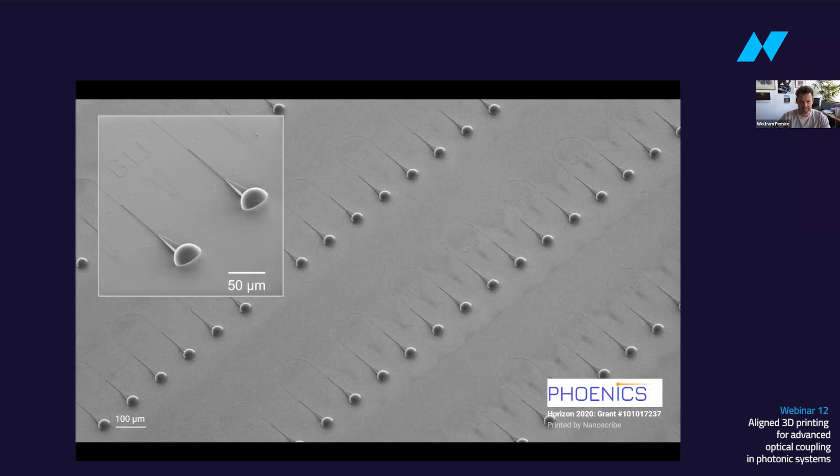Yeah, I shall. Thank you very much for the intro, and I hope you can all see my screen. If not, shout. Thank you for the kind intro and for the opportunity to speak here about the research we are doing. It's really a pleasure to present this, especially since we are very happy users of a Nanoscribe system - we use it basically every day in the lab for printing structures. Erik will show you some of the nice features we can build with them. That tool has also been somewhat instrumental in driving computing forward, which we now use in the context of AI. It's also great that Tobias is here, with whom we've collaborated for many years in the EU project, and actually also worked on improving the tools for printing such coupling structures in a hybrid project. So everything comes together very nicely today, and I'll set the stage and explain a little bit why I think this is a useful technology for the field.

So we come from integrated optics and build chips, a few of which you can see here on my first slide. These are semiconducting chips, many made from nitride or silicon, and we use those for doing computations - low precision computations that have applications in AI.

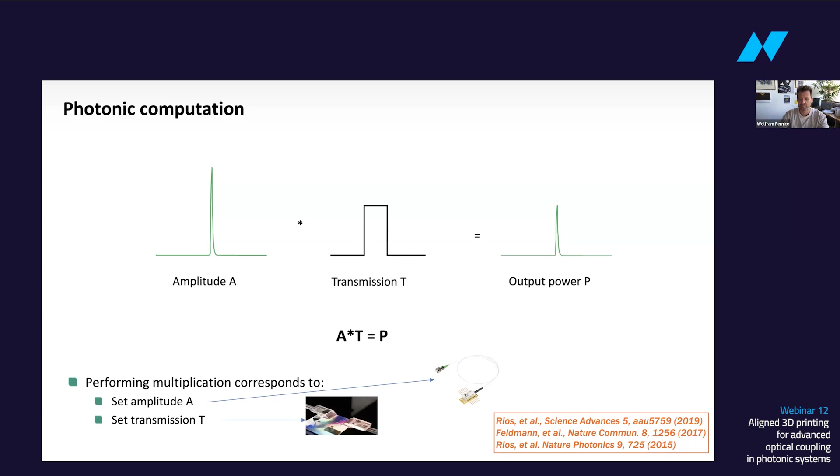You can do this nicely: you obtain a laser diode, with which you can set the amplitude by programming it. You then program the transmission factor, which you could do with a silicon photonics chip. And if you want to know the result of the multiplication, you measure the power at the output.

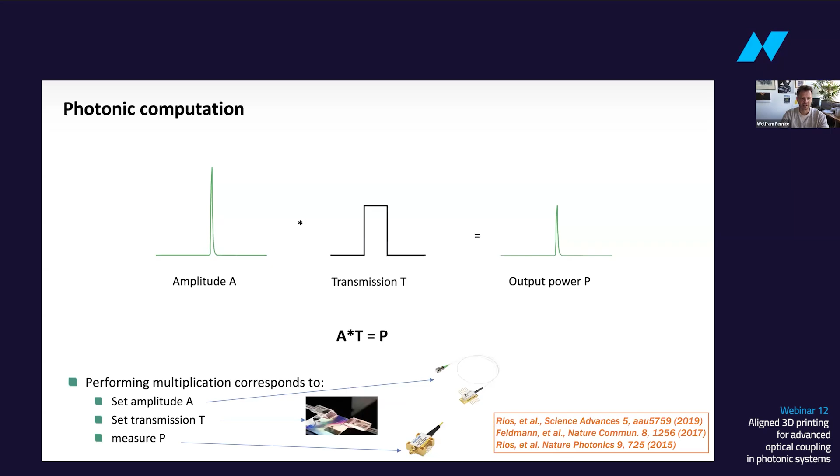This is attractive for us because the components are already available from silicon photonics. They also work at typical telecom frequencies, so very high speeds compared to digital electronics, meaning you get your answer in extremely low time frames — this is where latency matters. You can also do this relatively efficiently as long as your components are efficient.

If you want to scale this, all you have to do is make many of such devices. One approach we used is to take a light source that provides not a single input laser, but many of them — this is a frequency comb, for example.

We would encode our image in the input vector, using several modulators to set the amplitudes of each individual wavelength. Then we add them together in a photonic circuit that couples all these different wavelengths from separate input waveguides into a common output waveguide, where we perform the result by measuring the total power with a photodetector.

By doing this, we perform a very basic vector-vector multiplication: we multiply the input vector times the modulation, so multiply the numbers A and T, and get the full result of this operation in a single shot. And if you can do this for one row, you can do this for many, giving you a mathematical matrix implemented on a chip.

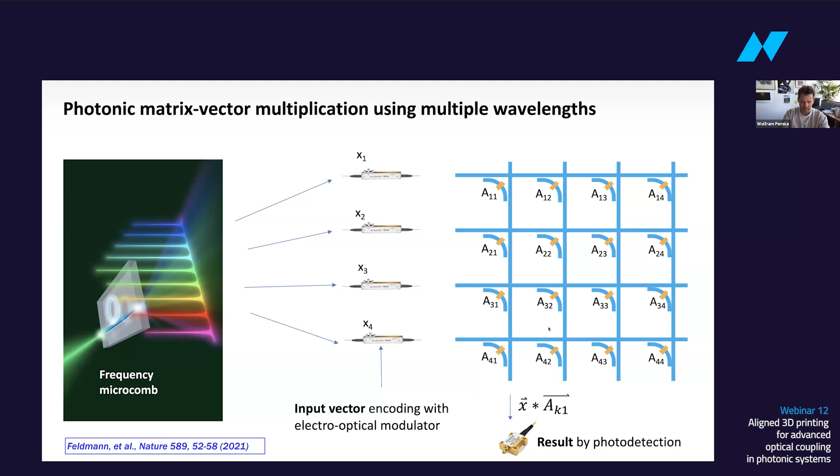Now I'll spend a few minutes explaining how we build those chips. We do this in the clean room. We don't work on wafer scale, but on a chip level.

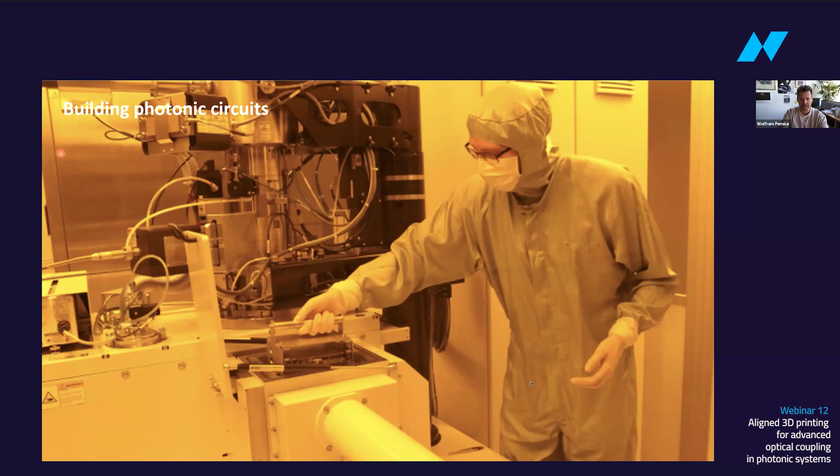We write our structures by electron beam lithography, and with the nanoscribe, as I will show you in a little bit, we etch those into our favorite semiconductor, silicon nitride or others. Then we get these nice looking chips here. If you zoom in further, you can also see the tinier structures needed because we work on the sub-wavelength scale. These are different types of resonators in silicon nitride and silicon, also photonic crystal structures. These are the typical elements we use for implementing these transmission factors for matrix vector multiplication.

This enables us to actually talk to these chips. We use two-photon polymerization to write fancy 3D structures directly onto these little waveguides, transforming a very small and confined waveguide mode into something that resembles much more an optical fiber. This has really been an enabling technology for us. It's also heavily driven in Karlsruhe and Heidelberg through the excellence cluster 3D Matter Made to Order, where these structures are built. On the chip you can see a selection of such coupling structures, and Erik will give you much more detail on how they work. They're basically total internal reflection systems that transform an in-plane mode into an out-of-plane focused beam, which we then collect with an optical fiber to read out the performance of our system.

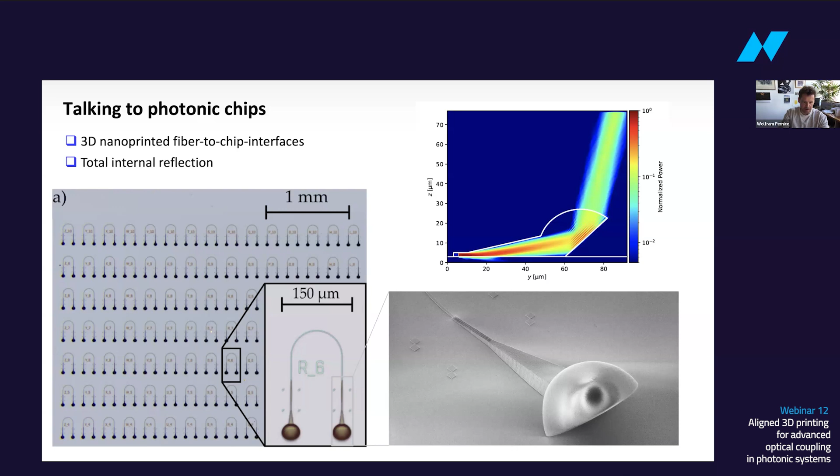What then needs to be done is house this all in a framework compatible with a computing architecture. This is the latest system we've built. It's a box that has all the driving electronics for the lasers, modulators, amplifiers, and detectors. You can also see here, in this circuit board on the right-hand side, the chip that is actually doing the optical calculation. It is fiber coupled through a special interface, and the rest is electronics, but it's small enough that you can fit it in a car or use it as a desktop, and it does exactly this acceleration.

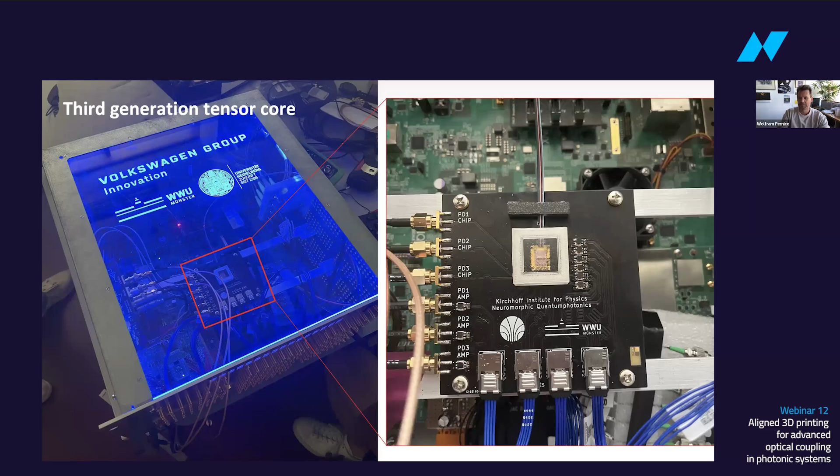I think at this point I'm way over time, and I'll hand over to Erik. I also thank him and the rest of my group for this work. This is basically the team that builds these optical computers and realizes all the systems in the clean room.

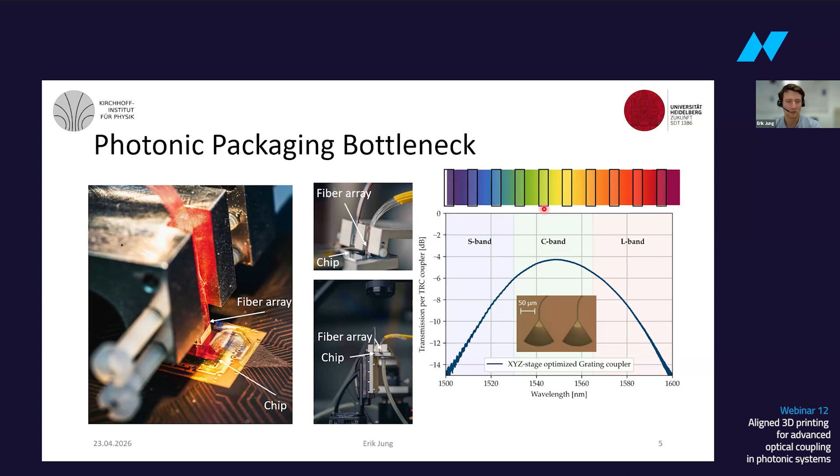However, those grating couplers do have a great wavelength dependency. What you can see here is the transmission spectrum, wavelength against transmission per coupler. I want to illustrate what this means once again using the visible spectrum I showed you before. Here we are working in the telecom band, as Wolfram already mentioned, but as an example I show you the visible spectrum because there are no visible wavelengths with which I can encode that. So here's the visible spectrum, and if I were to use a grating coupler to couple this visible spectrum inside my photonic chip, the coupler would absorb part of this transmission spectrum, and it would look more like this. So basically a couple of those wavelength bins are gone.

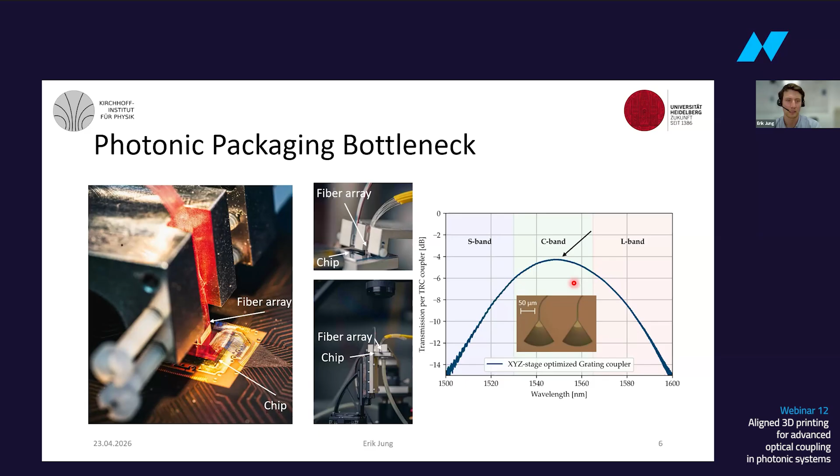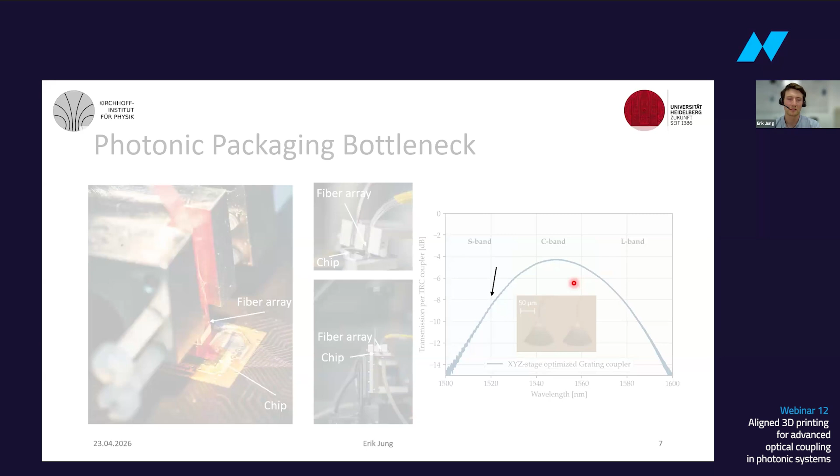This gets even worse if we look at this problem in real scale units. If we look at the peak transmission here of our grating coupler, I will now reduce the brightness of my slide accordingly—basically the image of the slide is sent through the grating coupler at this wavelength, and this results in this transmission. If we go 30 nanometers away from the optimum—in the visible spectrum, the equivalent of going from green to yellow—you only see this much. And this is only the efficiency which is absorbed by the coupling interfaces.

So as you can see, there are a lot of open challenges in the domain of photonics. For that reason, Wolfram came to me at the beginning of my PhD with this wish list for photonic packaging.

We want to profit from the full multiplexing capabilities of photonics without loss of data. So we want low loss and broadband coupling. We want to interface multiple ports at the same time, so that we can realize photonic applications and not only address individual ports. As I showed you on the right-hand side, we also have electronics on our photonic chip, so we want the capability to co-package electronics and photonics. And last but not least, we want passively self-centered alignment like in electronics.

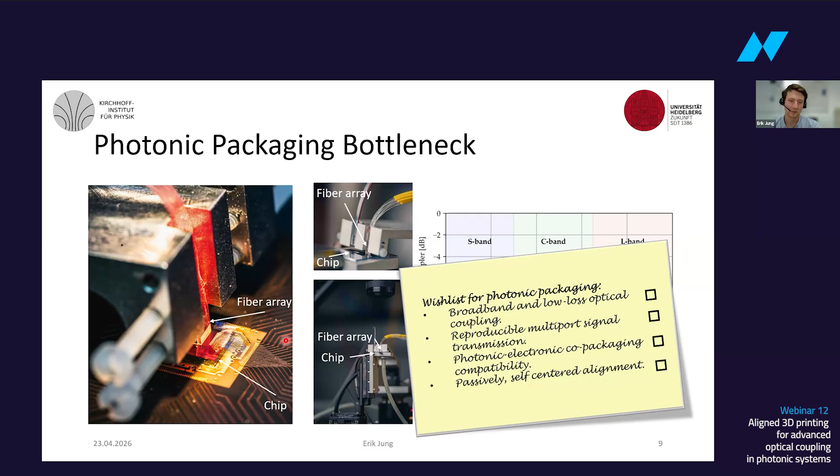So we sat together at University of Heidelberg and came up with this coupling concept. On the left-hand side you can see a sketch of the coupling concept. We use a fiber array, an MTP cable, with included alignment pinholes, and fabricate the alignment counterpart directly on the surface of the photonic chip. Those pins are the alignment counterpart onto which the MTP cable is plugged. Coupling is done via total internal reflection couplers, which will be discussed in detail in the upcoming slide.

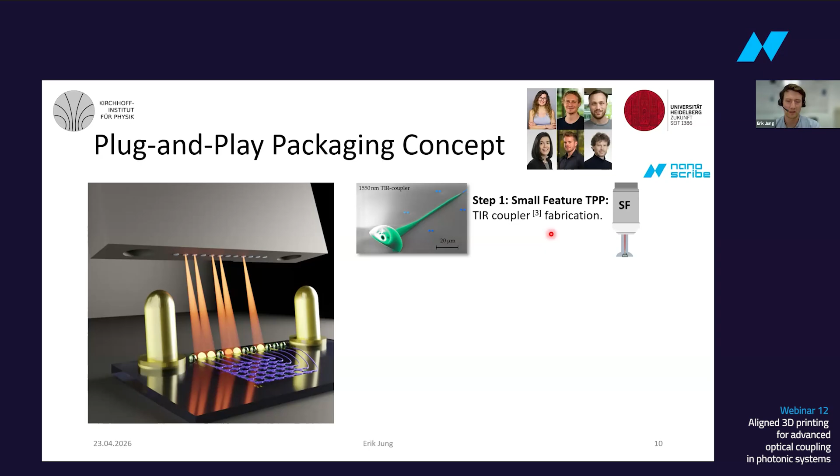This is a multi-step procedure where the Nanoscribe technology helps us in an insane manner. In the first step, with the small feature set of Nanoscribe, we write structures with nanometer precision and optically smooth surfaces. In the second DLW step, also with Nanoscribe, but this time with the 10x objective, we write the alignment pins as well as some spacers so that our fiber array does not crash into our photonic integrated circuit.

This preset is optimized for speed and micrometer precision. You might think this will take ages, but these pins are fabricated within 20 minutes, and they are 2 millimeters high, fabricated within 10 to 20 minutes with the technique of Nanoscribe.

In the third step, we deploy digital light processing printing to print a pre-alignment structure, which you can see here, which basically carries the weight of this MTP cable, as this is a centimeter-high glass fiber block.

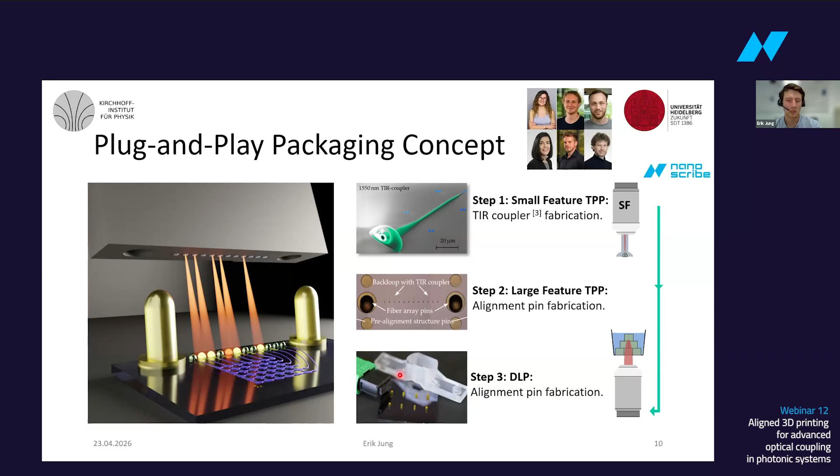So let's come back to the coupling interfaces. I was lucky to have a very competent predecessor, Helge Gehring, who developed the first total internal reflection coupler. On the left-hand side you can see such a coupler on a silicon nitride substrate. You have the silicon nitride substrate and such a polymer coupler on the substrate. The polymer couplers are written with aligned two-photon polymerization on top of the silicon nitride substrate.

They are based on total reflection and not on diffraction, in comparison with grating couplers, and are therefore very broadband. They normally consist of 4 distinct sections: the mode transfer section, where I transfer the on-chip mode to the polymer mode; the mode field widening section, as Wolfram mentioned, since the mode field diameter of the fiber is a factor of 10 to 20 wider than the one on-chip; then a total reflection plane, which redirects the light beam out of the plane of the chip to our fiber array; and then a focusing lens atop. This focusing lens focuses down the light beam and mimics the behavior of the diverging beam out of the fiber, and this is also the component which we optimized in comparison with Helge's original total internal reflection couplers.

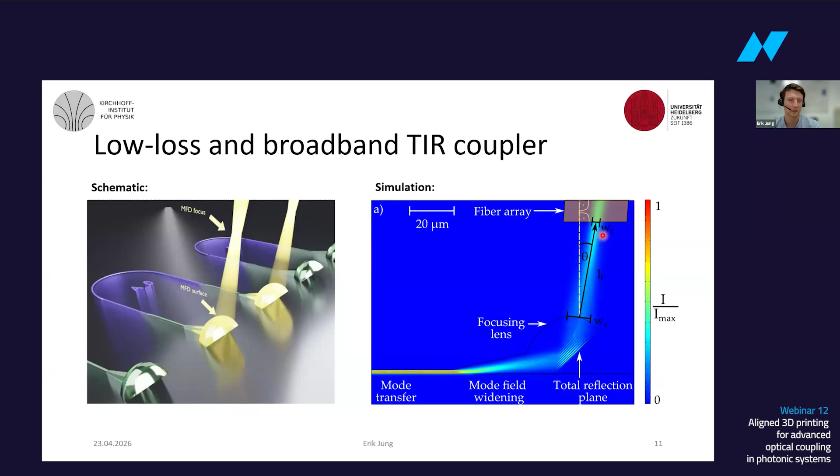On the left-hand side, you can see part of a chip which we fabricated with this technology. We printed 150 different coupler geometries, each 6 times, so in total 900 geometries done. With the technique of Nanoscribe, this is possible within one night slot.

One coupler takes approximately 1 minute with aligned two-photon grayscale lithography. If you cycle back, or if you are still a GT user, we also fabricated this beforehand with the GT, and it took 16 minutes per coupler. So there's an immense increase in speed using grayscale lithography.

On the right-hand side, we can see the transmission spectrum of the 3 nominally identical best couplers, showing the low standard deviation of the coupler transmission spectrum and basically their wavelength independency, plus their peak average transmission at 1550 nm of 0.45 dB. If we apply the same transparency filter, basically sending this image through a total internal reflection coupler, this results in blending down my screen in that manner, showing basically no deviation between what you saw beforehand and what you see right now.

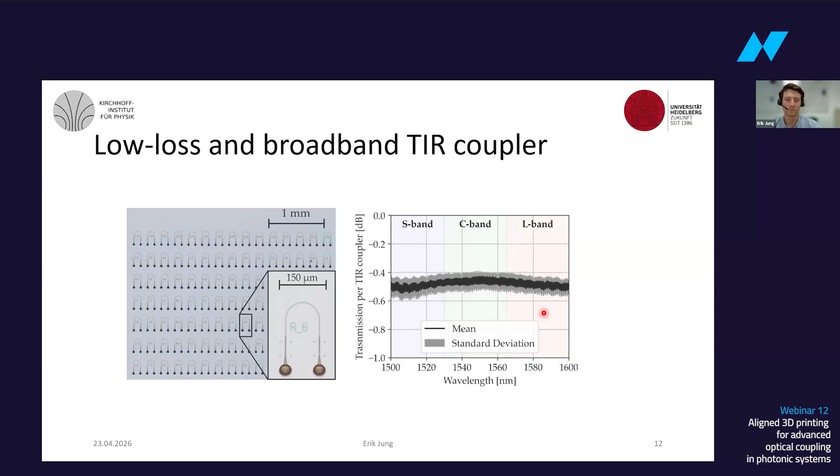To demonstrate the packaging concept is working with multiple ports, we interfaced a photonic matrix with 16 ports. Here you can see an image of this photonic matrix, the pins, and the 16 ports of the photonic matrix, and we compared the transmission of the individual ports to that of a grating coupler.

If we play the same game as beforehand, but this time on the left-hand side we are using the grating coupler to couple in, and on the right-hand side of the picture we are using the 3D coupler to couple in at the peak power of the grating coupler. This results in that image, and if we go further away, this results in that image. So basically we have, for the already packaged matrix vector plug-and-play connector, a higher transmission in comparison with

the state-of-the-art grating coupler, and this is only possible with structures based on... which are not based on diffraction.

If we now look at the close-up of the transmission spectra of the individual ports, we can see that they also have the same behavior in general. So all 16 transmission spectra show basically the same peak performance and also the same wavelength-independent behavior across the different matrix ports.

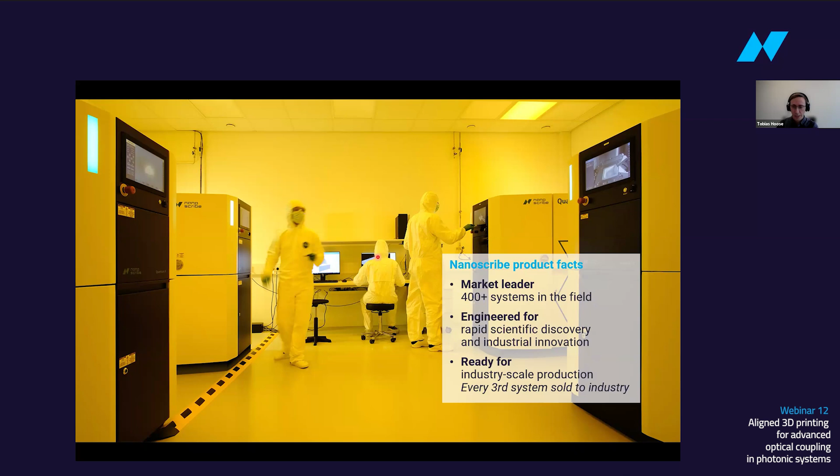Let me give you a quick look inside our lab here in our headquarters in Karlsruhe. This is the lab where I'm working, and we have here a small print farm with our Quantum X Align systems. Basically, here is the place where we push the limits of two-photon lithography, where we develop industrial processes for our customers, and where we run feasibility studies for prospects who are interested in our two-photon technology.

What can you do with our technology? You can do prototyping, you can fabricate templates for mastering, and you can also do direct manufacturing of optical elements, as you have seen already before, these out-of-plane couplers. You can print lenses on the edge of chips, or you can also use it to produce lensed fiber arrays.

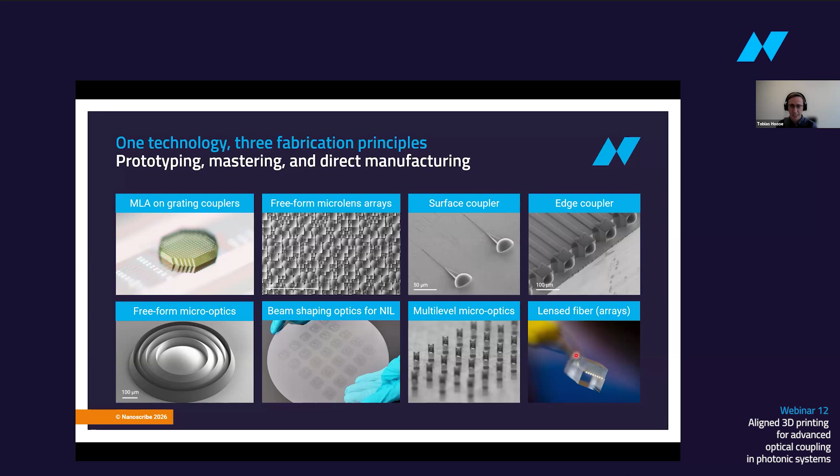We offer different print sets for this. For example, there's a small feature set used for highest precision, as Wolfram does in his group. With this set, you can print also these filigree tapers. Then we have the medium feature set, which is a very versatile print set with which you can print arrays of these lenses on a chip edge, but still get high optical quality lenses.

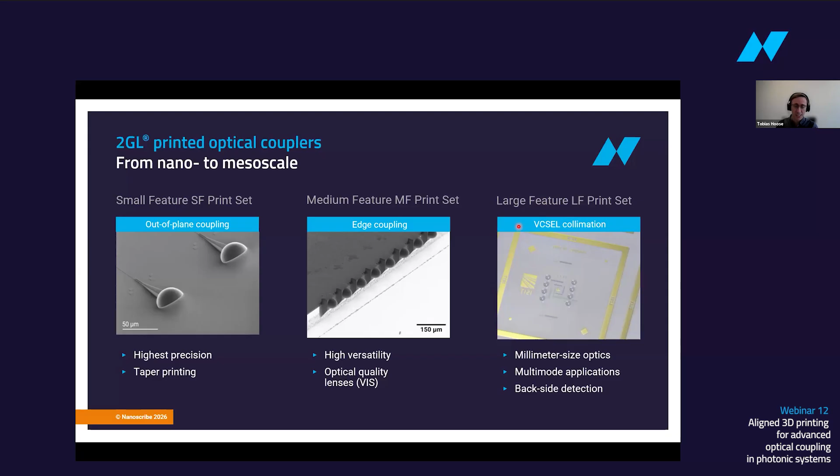Then we also have the large feature set with which you can print millimeter-sized optics, for example, for multimode applications. And the large feature set has a nice feature in that it has a very long working distance, and with that you can also do backside detection.

But to print good working optical elements, you not only need the hardware, you also need software that can take care of that, and that is also very user-friendly. Here you see a screenshot of our nanoPrintX software, and what we did, especially in the PHOENICS project with Pernice's group, as you have seen, they needed to print a lot of sweeps of their structures, and something like that you can very easily realize with our software.

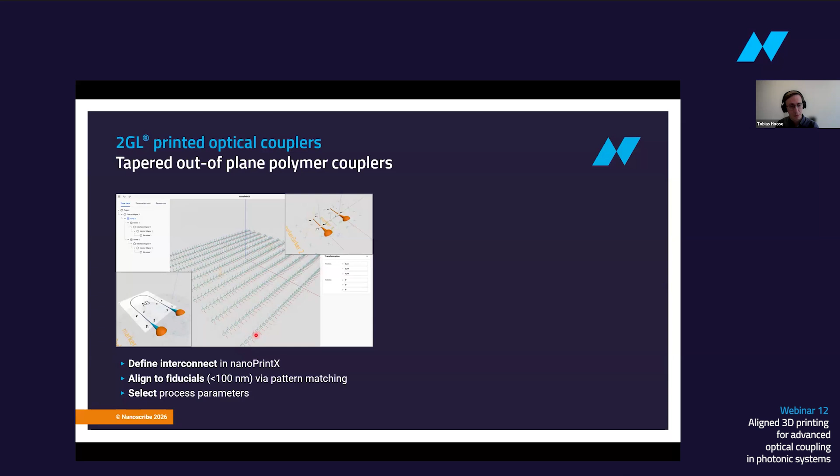Inside the software, you can define the interconnect you want to print. You can also load the GDS file or your wafer map, parts of that, align the structure inside the software to the fiducials which are on your substrate, select the process parameters, send it to the printer, and like that you can easily get hundreds of these out-of-plane couplers fabricated.

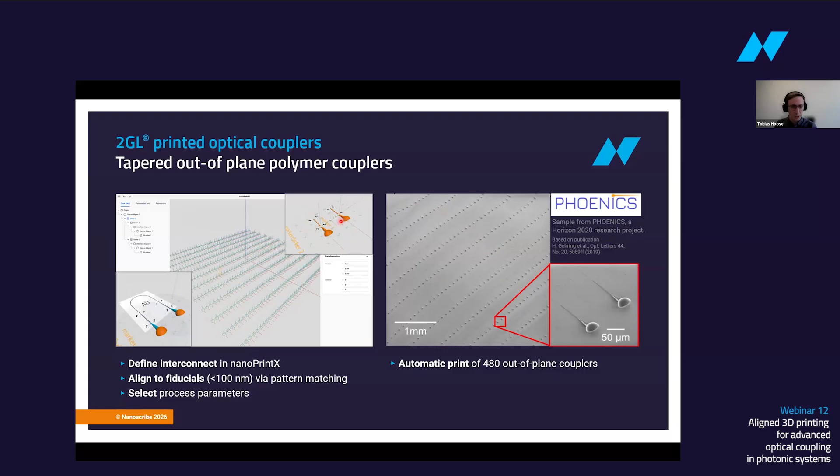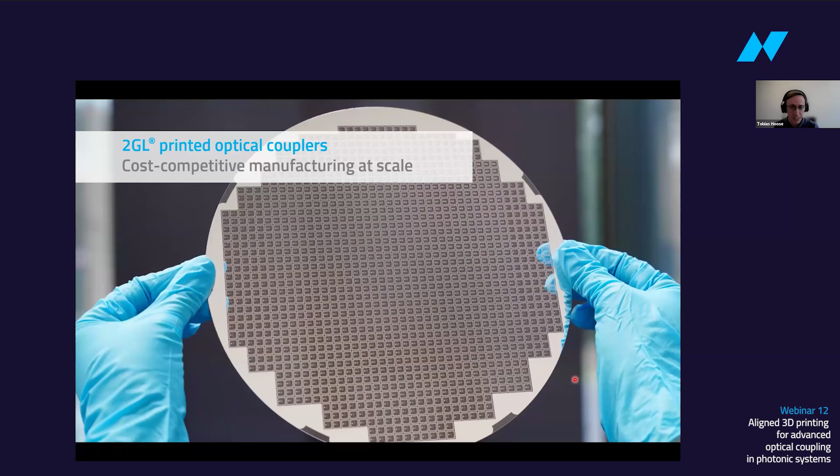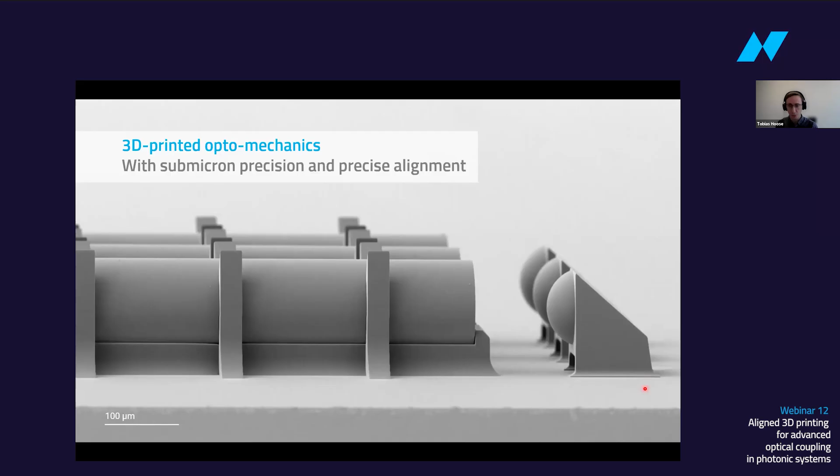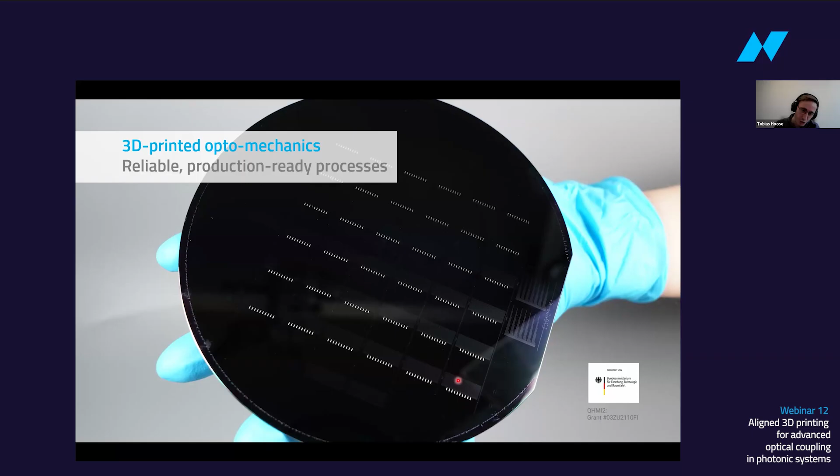And this also works on wafer scale. What you see here is a 6-inch silicon nitride wafer from IMS Chips in Stuttgart. These bright spots here are basically all these fiber clamps I showed you in the SEM image beforehand. And these less bright structures are the waveguides, which are connected to the grating couplers. All this is printed with our system QuantumX Align.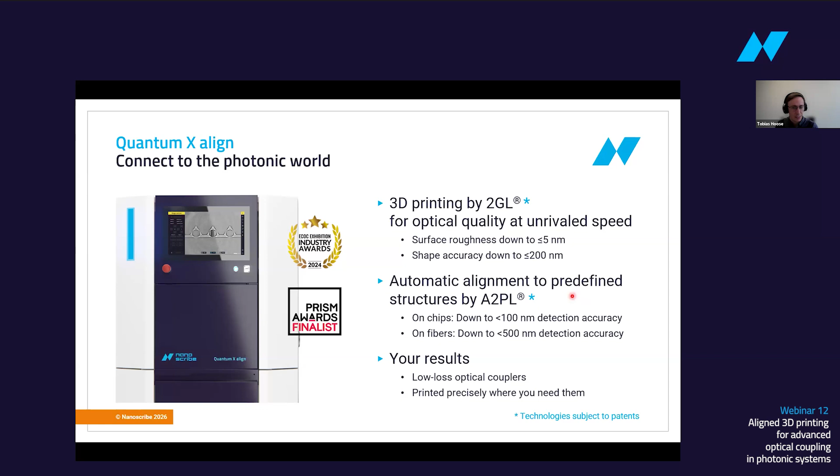The QuantumX Align comes with our Two-Photon Grayscale Lithography, with which you can reach high optical quality surfaces with low roughness and very good shape accuracy. Inside our system, we also have a confocal module with which we can align the structures you want to print to predefined structures on your substrate. And like this, you can achieve low loss optical couplers, printed precisely at the position where you need them.

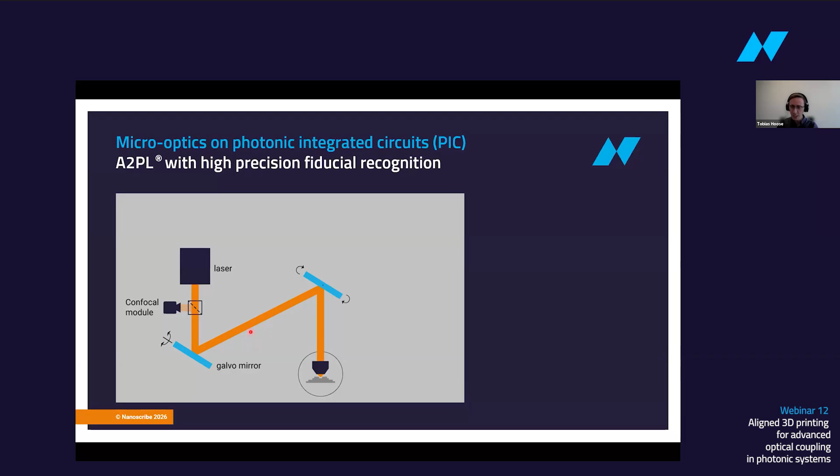Here's a very simplified sketch of our lithography system. We are using a femtosecond laser, which is focused through an objective into the photoresin, and it excites the photoresin to polymerize. By using fast scanning galvo mirrors, we can steer the laser back and forth through the resin. At the same time, we are moving the stage, which carries your sample along the axis of the beam. Like this, we can create 3D microstructures. And we included a confocal microscope inside the system for detecting alignment markers or chip edges of your substrate.

Since the same laser and the same optical path are used for printing and for detecting, we are already inherently calibrated. Like this, you can achieve very good alignment accuracies down to 100 nanometers.

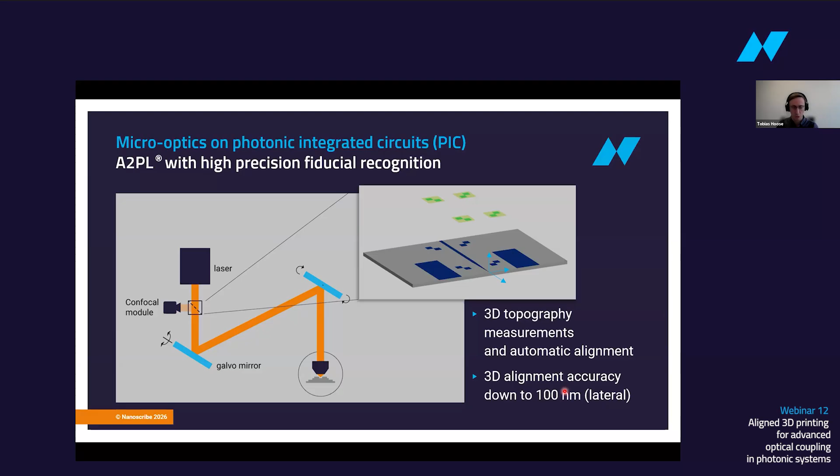This I just want to show briefly, since Wolfram has covered this. If you want to couple from one substrate to the other, for example from a fiber to a photonic chip, you need to match the mode fields to each other because they are typically vastly different in sizes. Also, the alignment accuracy or alignment tolerances are directly connected to the size of the mode field diameter. So how you can overcome these challenges: you can put optical elements onto the substrates, like collimating lenses, for example, and then you increase the 1 dB alignment tolerance drastically.

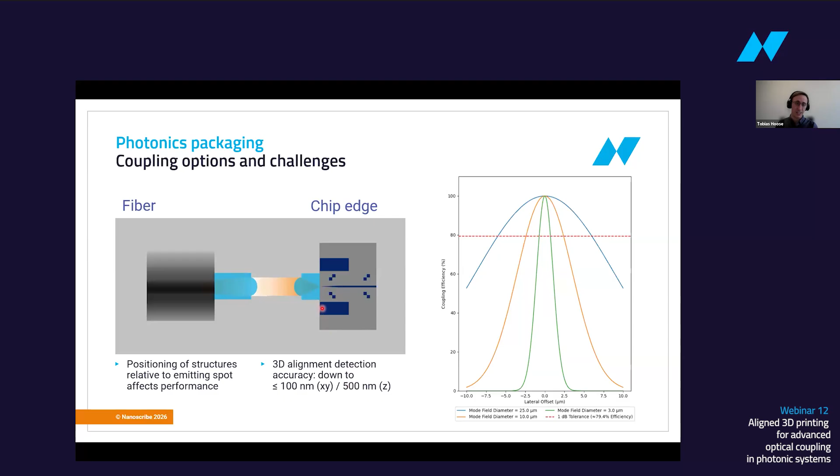On this right-hand side here in this graph, it's shown the alignment tolerances for example, a 3 micrometer mode field diameter compared to the one here in blue with a 25 micrometer mode field diameter. But this means on the other side, you move the alignment challenge from the packaging step to the two-photon lithography step. As mentioned, with our system, we really reach these high alignment accuracies. Like this, we can precisely print the structures to the output of the substrates you want to couple with each other.

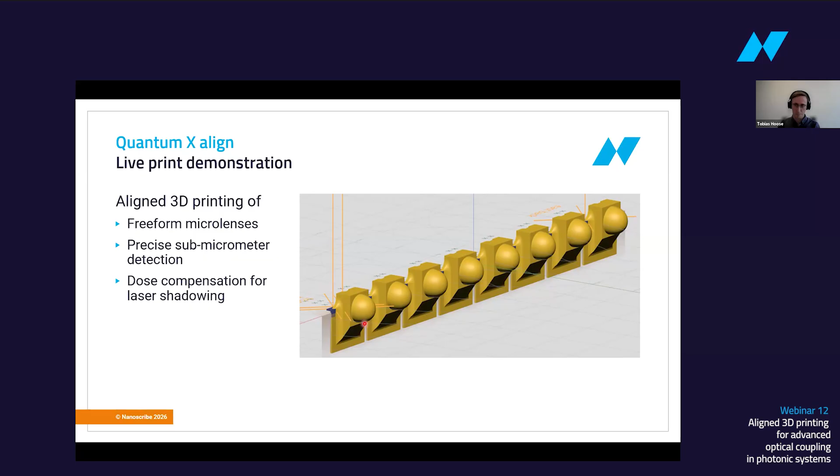I want to guide you now shortly through our NanoPrintX software, how to create there these freeform microlenses, how to precisely align them to the marker structures of your chip, and how to use the dose compensation over the chip edge. For that, I'm using the medium feature set, using IP-S as our standard resin, the 25 times objective, and the QX system QuantumX Align, which is down in our lab.

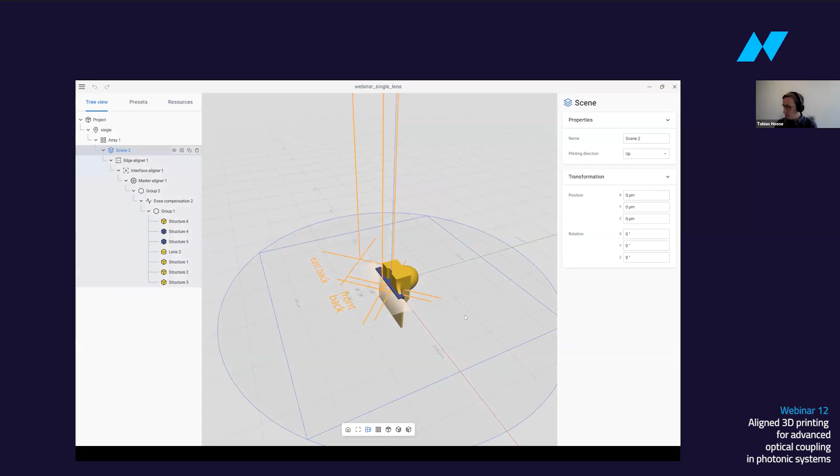So now let me shortly switch to the screen to our software. Here you see basically the main view in the middle. It looks like a CAD tool. You have here the lens, which we want to print. The lens has been simulated before.

Now here we are, sorry. The lens has been simulated beforehand. In Nanoprint X, we are using a conic lens description, a conic lens formula, and the parameters of that you can directly type in here, like the curvature of the lens or the conic constant. Like this, the lens is directly created in Nanoprint X. You don't need to create an STL file externally and load it in. You can do that directly in here.

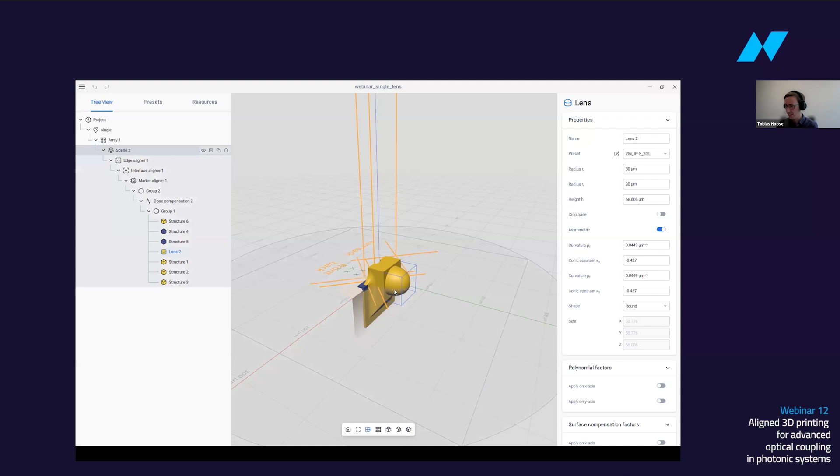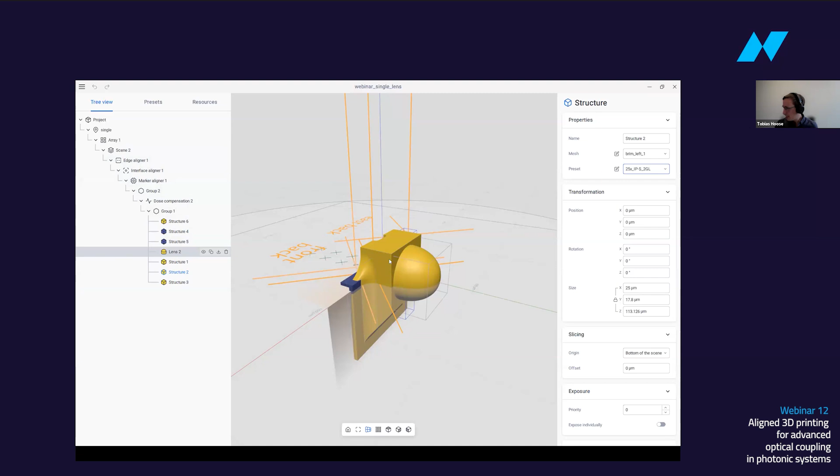We then have here some adhesion structures and support structures around the lens. And to each of them, I assign the 2GL IP-S preset. In the presets option here, you find all our standard presets that we developed here at Nanoscribe. I use that basically for all of the structures. Just around the chip edge here, I use an adapted preset with a little bit less laser power to avoid bubbling around the interface between the silicon oxide of the chip and the back silicon.

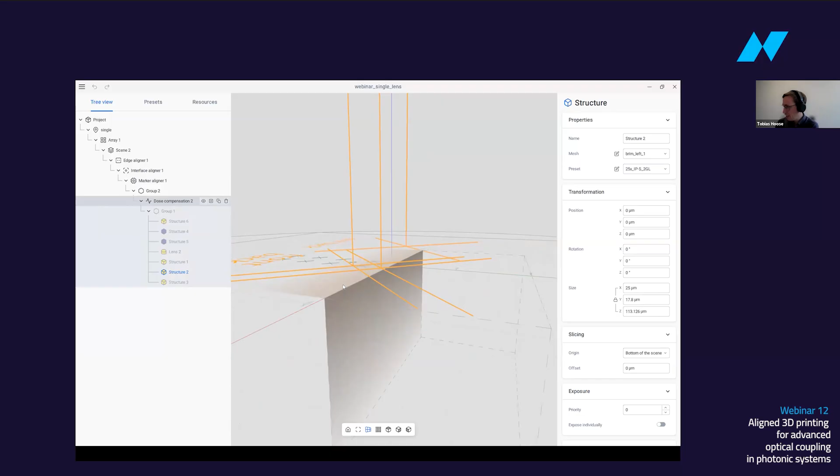Then we have the so-called dose compensation. When printing from the top over the chip edge, our laser spot is a little bit clipped. For that, we compensate the laser power. This is done here with this node.

I forgot to mention, on the left side you see the tree view, and on the right side you always have the properties of the node we are looking at.

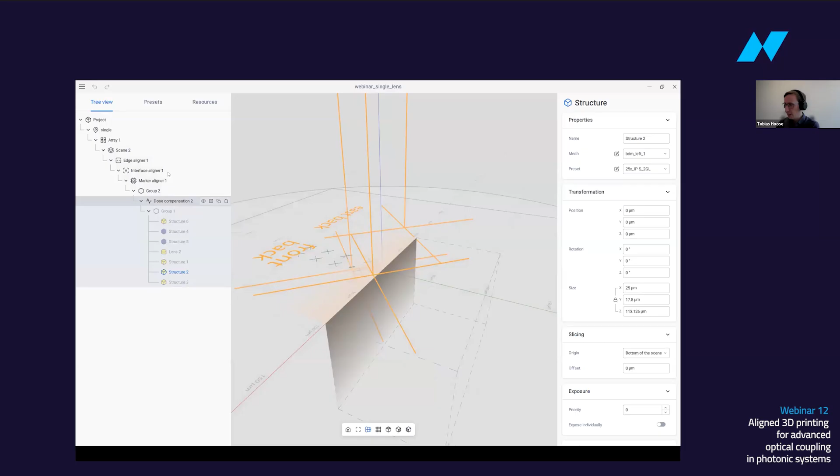We then have the marker aligners. The markers we typically use are these double square markers. They are confocally detected inside the machine, and the structure defined later on underneath this node is then aligned to the detected position of the marker.

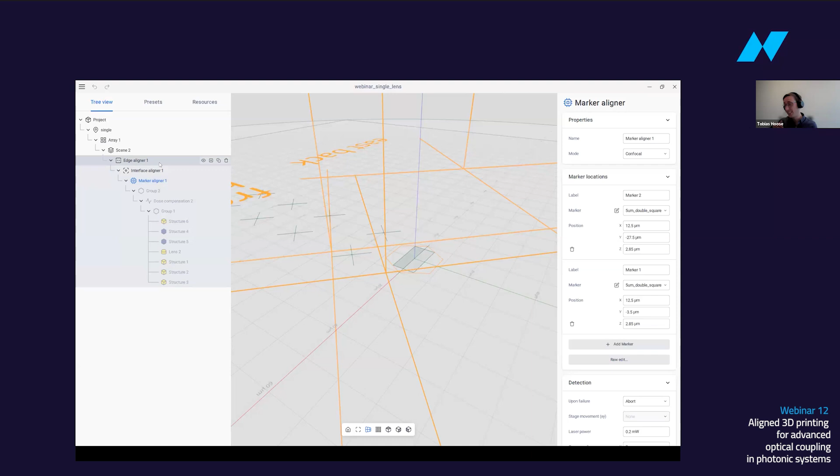For detecting the interface and the tilt of the chip, we are using an interface aligner. Then we also have an edge aligner to precisely detect the chip edge and the rotation of the chip. And last but not least, we have the so-called coarse aligner.

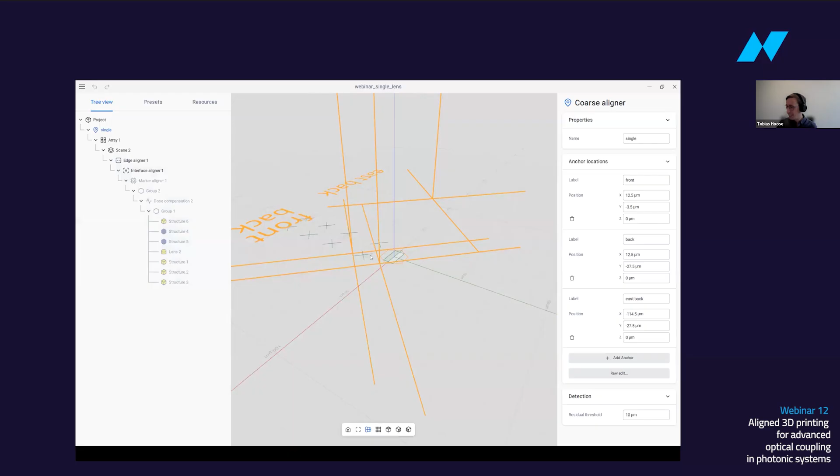With this coarse aligner we interact with the machine, I'll show that later on. We can tell the machine where the chip, your substrate, is located in the machine coordinate system. So the machine knows where the chip is, and then starts the printing job.

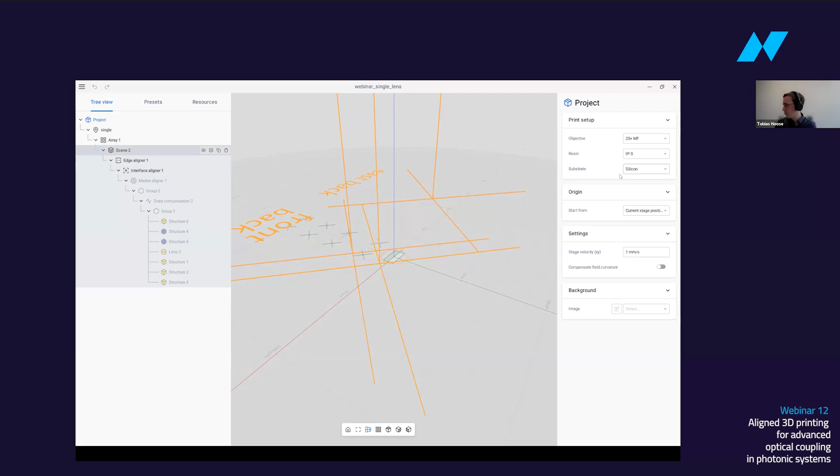Then we choose the medium feature preset print set for this demonstration, IP-S as our standard resin, and silicon as the substrate. We then load it to our machine.

It says upload successful, and then we move over to NanoConnect X. NanoConnect X is a software to remotely connect with our printer. It's the same view you have standing in front of the printer and using the touch screen.

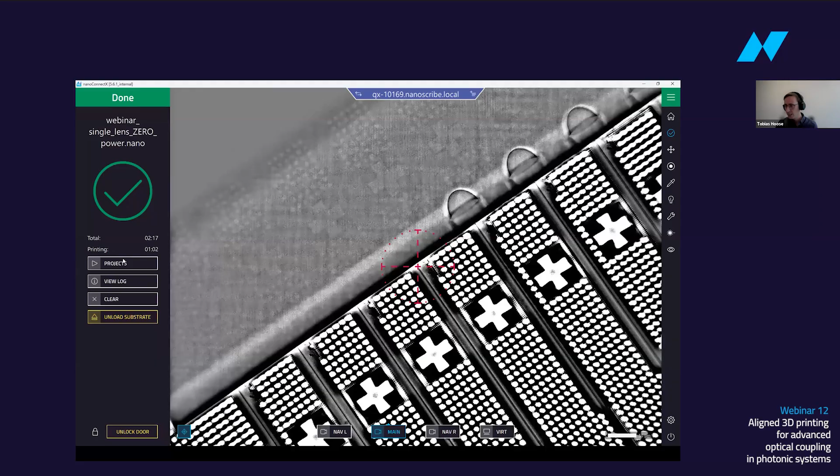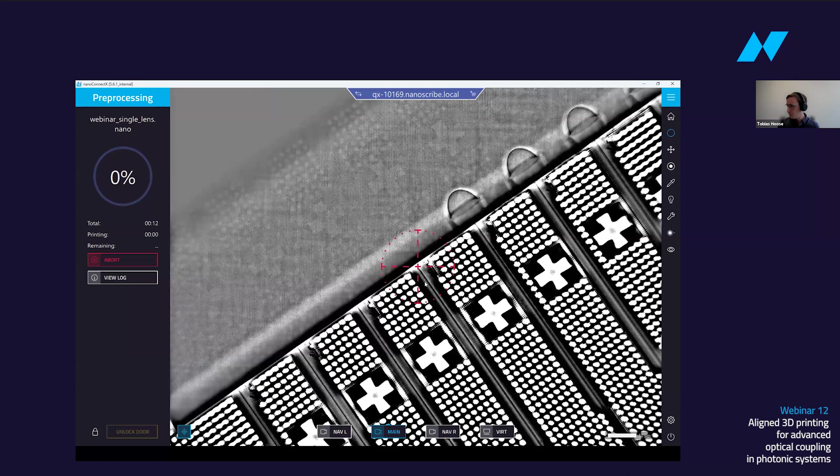We then start the job we just uploaded. Then it's doing some pre-processing, loading the structure into the RAM of the PC. While double-clicking inside the screen here, I can move around on the sample.

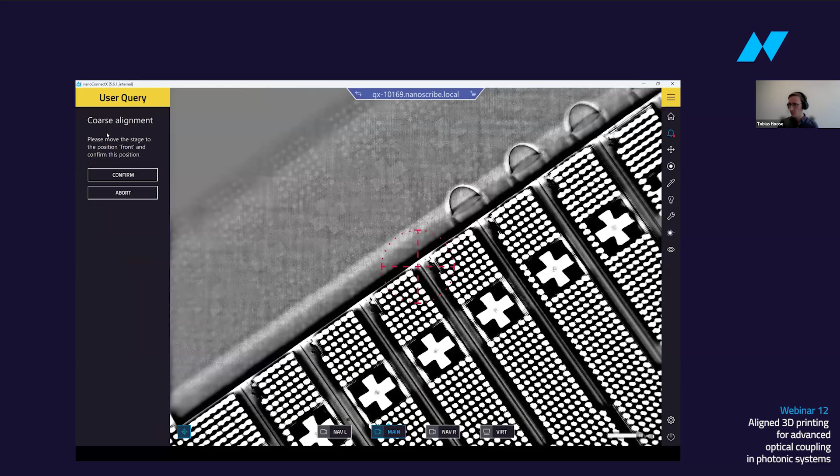Now it's asking me about the coarse alignment, so where are they? I choose them to be these markers on the chip. This is the front marker, I confirm the position. I move to the back marker, confirm it too. Now the machine has already got two positions and has an idea where the chip is and how it's rotated.

For the third position, I automatically move. I see this is already more or less correct. I confirm the position, and now the whole job is running automatically.

You see the chip is now getting a little bit defocused, so the machine is doing the interface finding, doing a Z-scan, finding the interface, then doing an edge detection, doing the marker detection, and when it's done with that, it's moving down along the facet of the chip and basically starts now to print.

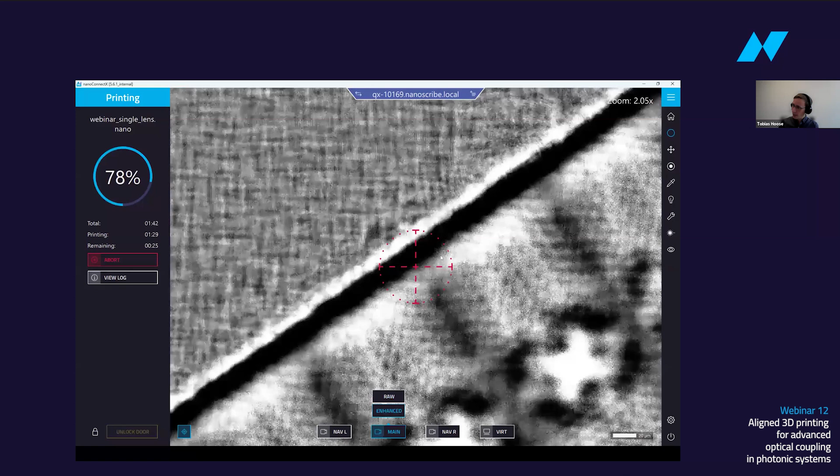Here, very down at the edge of the chip, you can see now the laser moving back and forth. I think due to the latency of the Zoom call, you cannot see it moving as quickly as I see it live now.

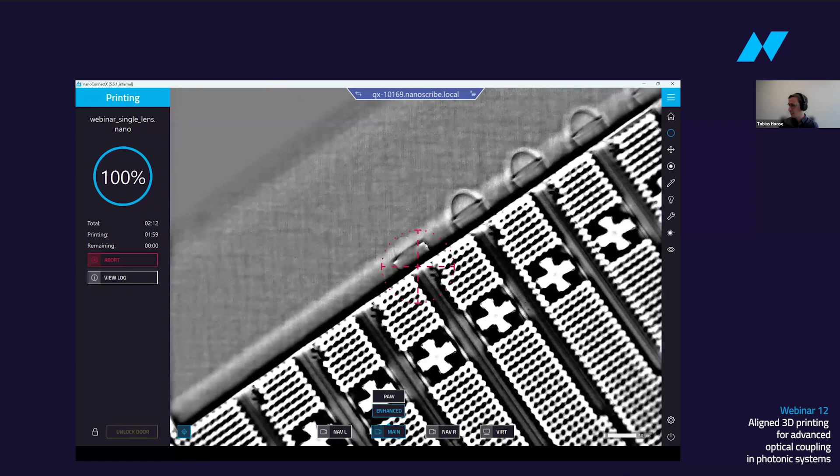But what you see is not exactly the laser beam, it's the fluorescence of the resin. And now you see here the support structure already forming. When it's polymerized, it changes a little bit the refractive index compared to the liquid state, that's why we can see it.

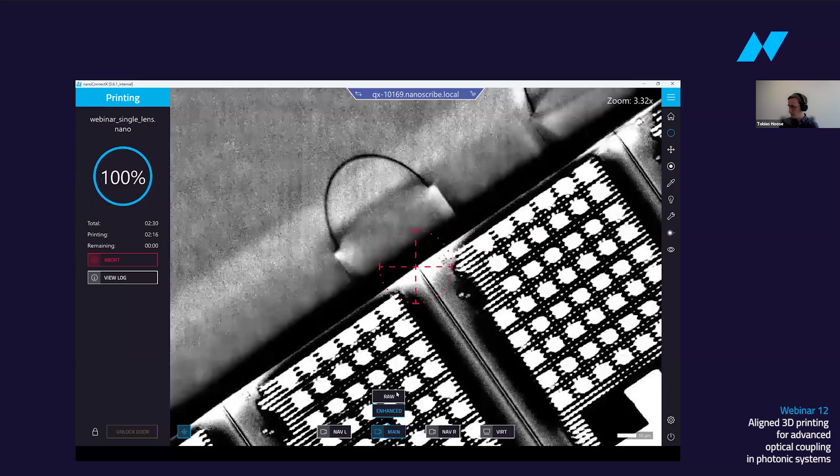Now you see here the lens forming, and you also see right at the chip it's printing with a little bit different laser power. You can see that here also in the raw view.

So we have two camera views. The enhanced contrast view is sometimes helpful to see different things on the cameras.

And we're almost more or less done. You see here now printing on top of the surface of the chip. And after your print is done, here we are, it says we are done. Took us now printing 2 minutes.

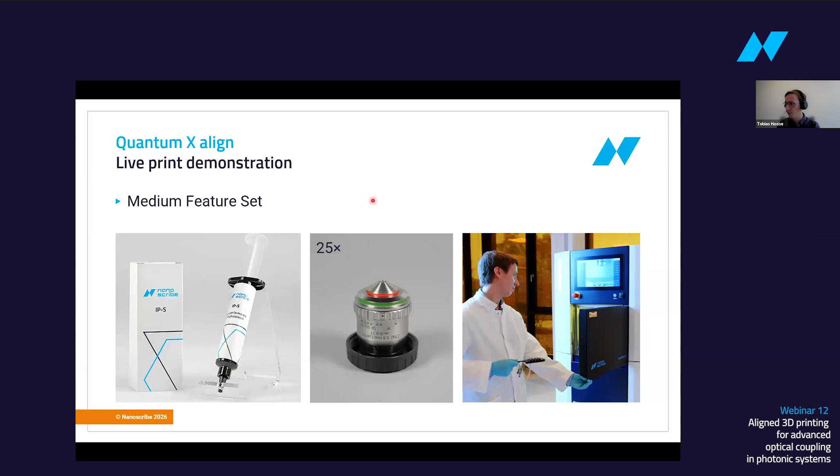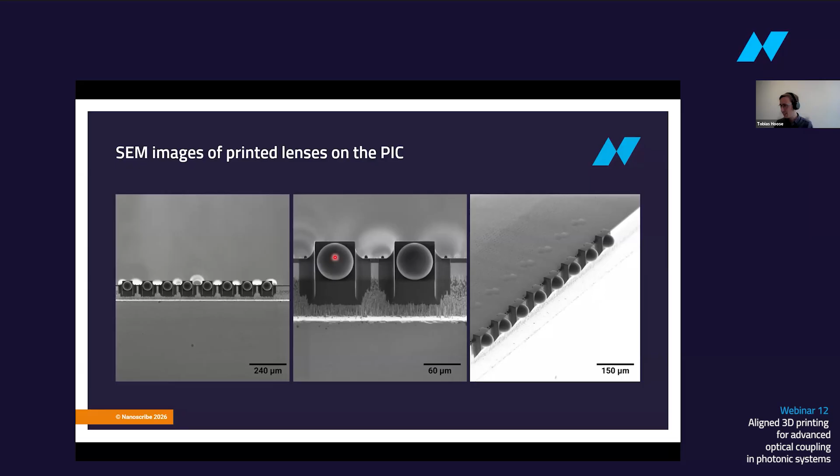After your print is done, we take it out of the printer. We develop the sample, washing away the unpolymerized resin. Then one thing you can do is take it to the SEM and get nice images like this. Here we have the array of those lenses printed to the chip edge, very well attached, and the lens surface is nicely smooth since we are using grayscale lithography.

As mentioned, we also used it in a real coupling experiment, coupling from one fiber into the chip, propagating through the loopback waveguides, getting out again and coupling back into the fiber. Like this, we had about 40 interconnects in total and an average coupling loss of 1.5 dB.

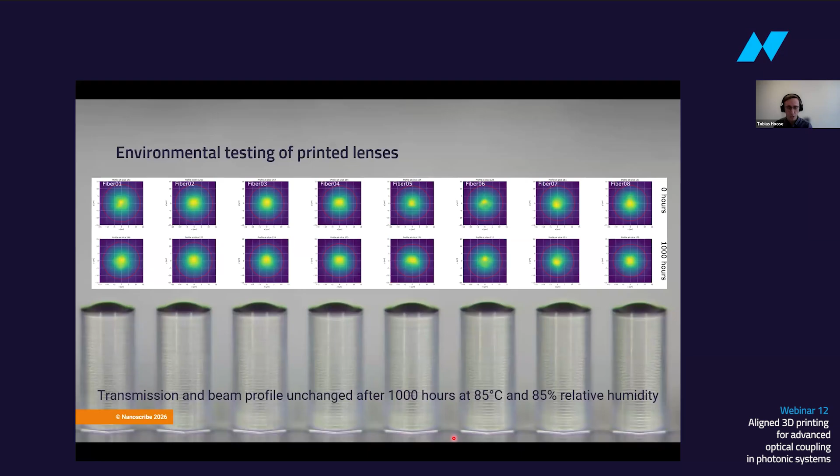We then went a bit further and did some environmental tests with these printed structures. Here on the bottom, you see those collimating lenses on the fiber array unit. We put it into a climate chamber for 1,000 hours at 85 degrees Celsius and 85% humidity, and afterwards the beam profile and also the transmission basically stayed unchanged.

We also conducted some other environmental tests, like laser induced damage thresholds. So at 520 nanometers, for example, we are with IP-S at 45 kilowatts per square centimeter. We also did some other temperature tests, for example for reflow soldering, because that's what you need for co-packaged optics.

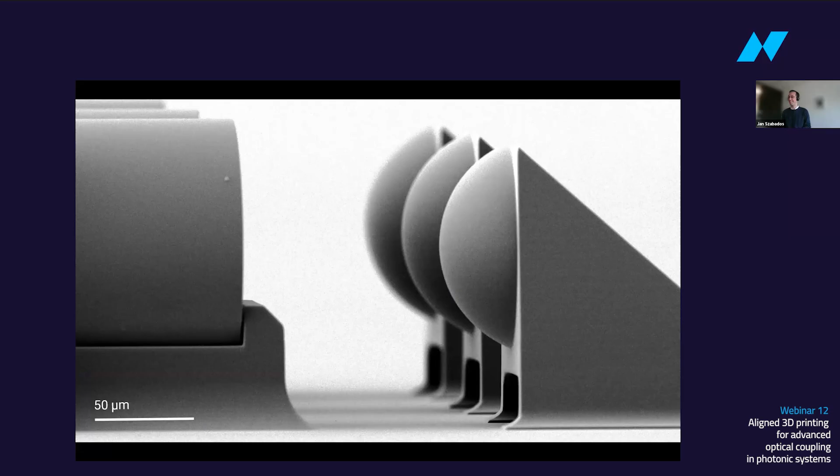I would like to start with the question about the image I'm showing. This is an image Tobias also showed, and it was a question about what the application was here. So why were these fibers clipped this way, and what was printed here? How was this done?

This was basically for a jointly funded project where we aim for a quantum sensor, and for this we used a photonic chip from IMS Stuttgart, where we had grating couplers on the chip, and we wanted to place the fiber stable in place. We needed only a few fibers, we didn't need a whole fiber array, and for that we came up with these clips.

So basically using a single fiber, and as I said, the grating coupler is basically underneath the optical structure. And then you don't need to have an active alignment - you can passively align the fiber. Also, during the coupling experiment, the fiber stays in place and is not drifting away.

All right, thank you very much. We've received multiple questions for Eric on the alignment pins. So you showed that you not only print the coupler itself using two-photon polymerization, but that you also print the pins. People asked whether this was tested in real life or how well it worked, because of course it's polymers, so people were wondering if these are stable enough to be used and how you use them. Do you need lab level equipment to use this, or how does it work?